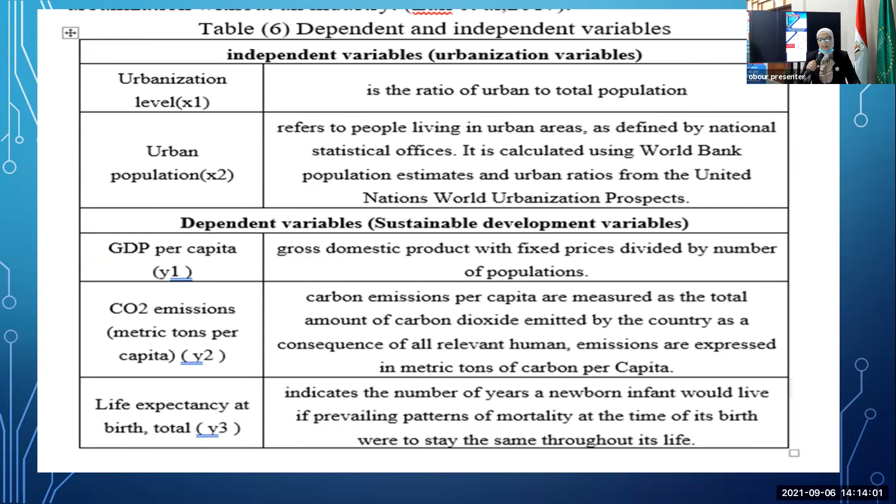Results: in the short run and in the long run, there is a significant relationship between GDP per capita and life expectancy, and CO2 emissions and urbanization indicators, where the value of R square reached about 90%, 90%, and 63% in order.

In South Africa, in the short run, there is a significant relationship between GDP per capita and life expectancy, and CO2 emission and urbanization indicator, where the value of R square reached 96%, 99%, and 31% in order.

But in the long run, there is no significant relationship between GDP per capita and urbanization indicators. That means no cointegration relationship.

Recommendations of this study: the necessity of relying on less air-polluting means of transportation in Egypt and South Africa; increasing the interest of South Africa in industrialization, innovation, and smart cities in order to achieve urbanization; and when going to urbanization, it should rely on clear and planned strategies in order to benefit from urbanization advantages and not rely on random plans.

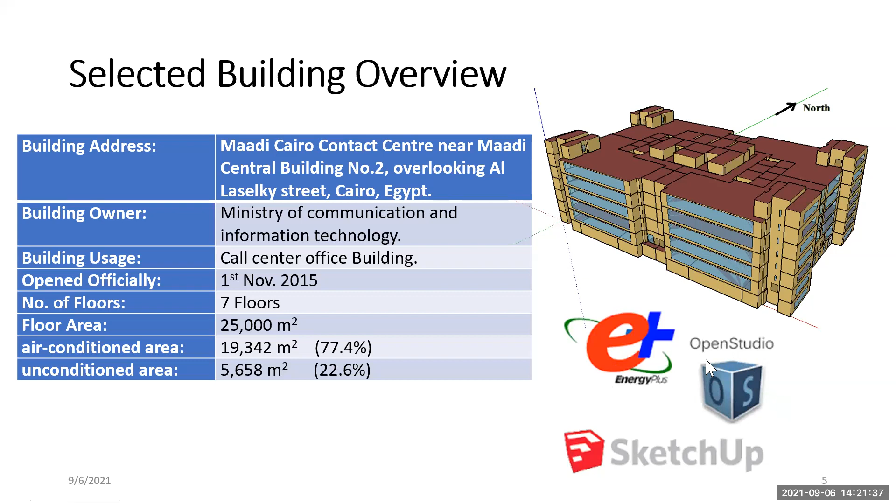So here we can see the construction of the building, and the existing building envelope thermal characteristics were obtained from the design package.

The construction of the external wall consists of sandstone and air gap insulation board and so on, with the corresponding U value around 0.28 watts per meter square Kelvin.

The glazing has a solar heat gain coefficient of 0.3, and the overall U value around 1.44 watt per meter square Kelvin. The glazing has a window-to-wall ratio of 25%.

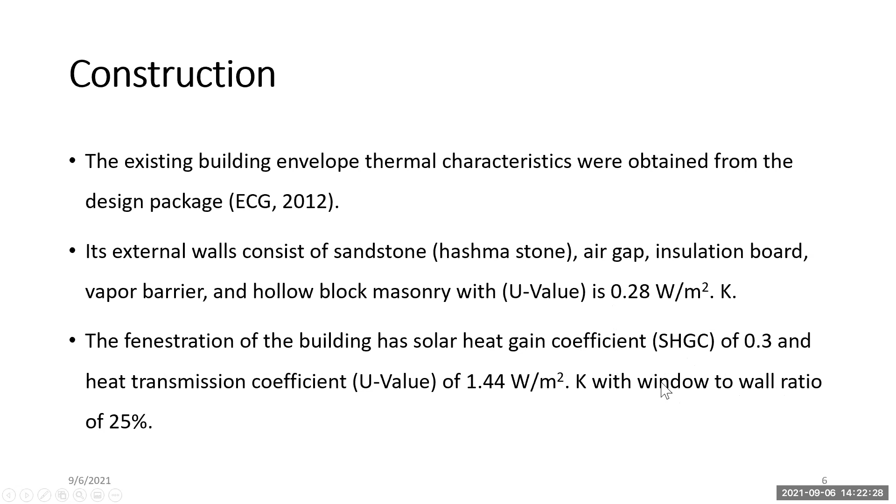Here is some information about the spaces and gains in the building. We have 251 spaces. The total occupancy per shift is around 3,100 persons. We have 3 shifts, so the building is always occupied 24 hours per day, 7 days per week. The people density is around 8 meters square per person.

Lighting schedule and values are shown here in the table. Also, we take into consideration all heat gain from the electrical equipment and the ventilation, and the schedule for each activity and each gain, like lighting, ventilation, and so on.

Here we also show some schedules for the call center area, the occupancy schedule along the day, and also the training room occupancy schedule along the day. These values change from work day to weekend or vacation day.

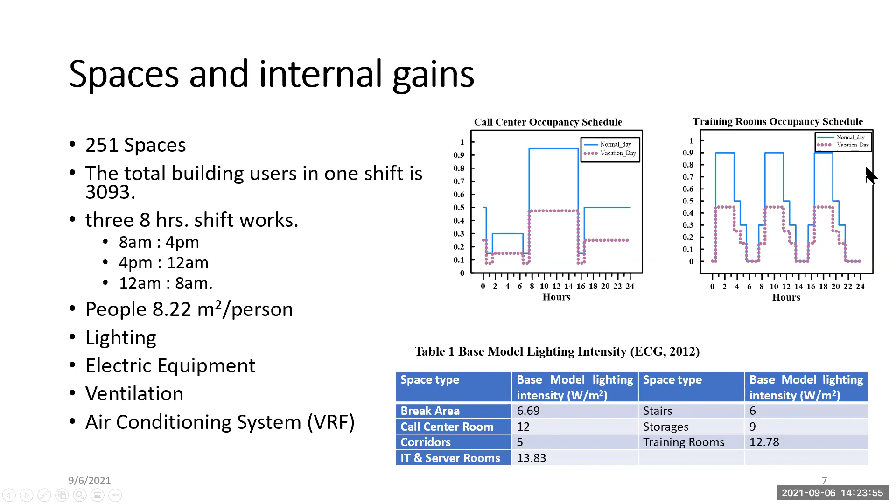So let's go to the results. Here's the annual result for the space cooling on the left and the space heating on the right.

We can now see the space cooling demand reaches around 50 watt per meter square in the summer, and the heating demand is quite small, only 1.2 watt per meter square.

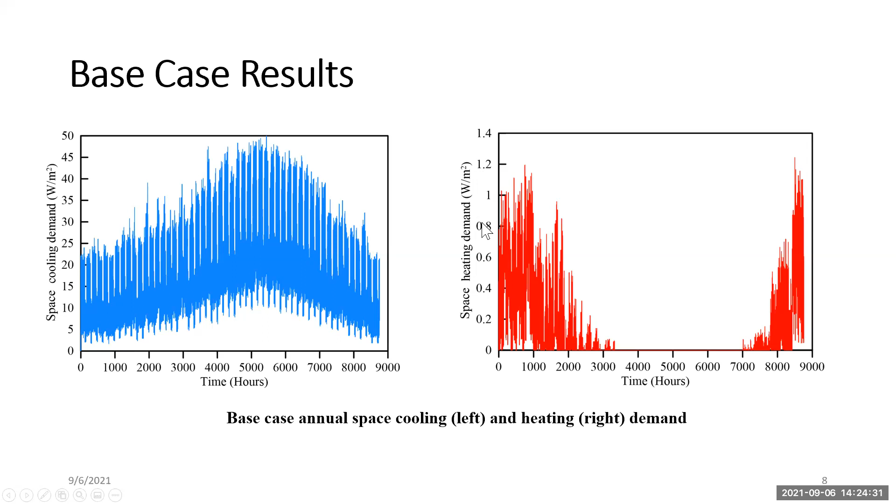In the winter, if we look into the monthly and annual demands, we can see the breakdown for the equipment demand, lighting, electrical demand, heating and cooling, and the summation of all in the black points.

This result is compared with the actual consumption obtained from the electrical meters feeding the building, and there is a good agreement, with the average error around 2% and maximum error around 8%.

If we look at the annual amount of the demands, the cooling demand has the largest portion, followed by equipment and lighting, and a very small amount of heating load. So after the validation...

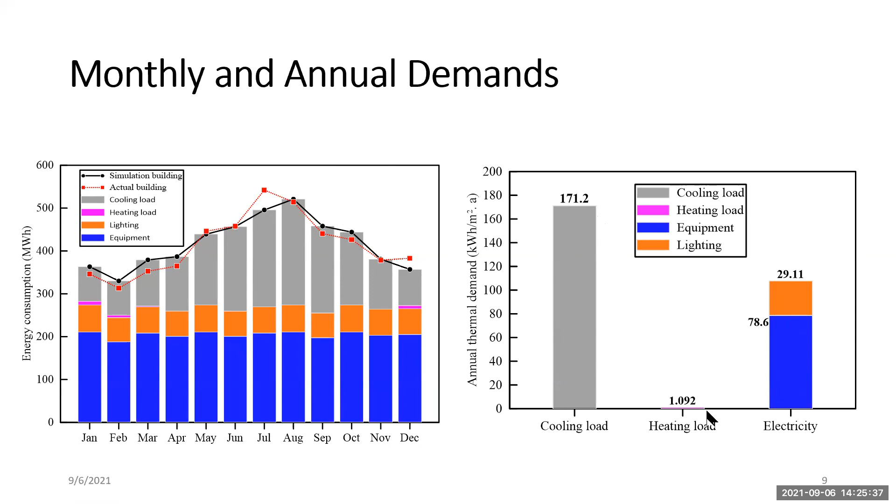We went to how to develop or reduce this energy demand. So here we suggested 7 alternative glazing types rather than the base model, and simulated these to see how much reduction we could achieve.

Here's the characteristic of the 7 types, with the first being the base model data. Here's the amount of cooling demand in kilowatt hour per meter square annually for each type. Of course, we can see type 7 has the largest energy saving regarding cooling.

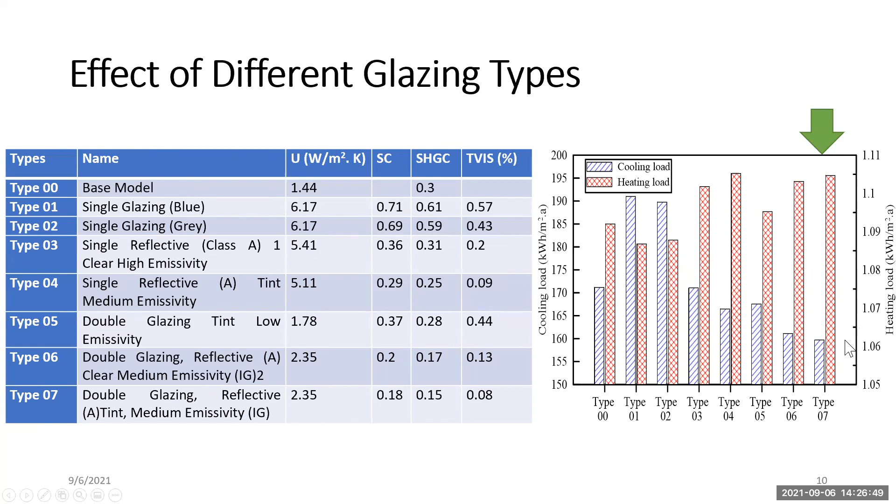However, it increases the heating demand, but the heating demand is already a very small amount. So changing the glazing in the base model to type 7 with these characteristics will reduce the overall demand of the building by around 11%.

Also, when we change or focus on the lighting fixtures and use LED light compared with other types in the market, we found that LED light with high efficacy lighting will achieve the minimum energy demand.

This reduces the cooling demand by around 8%. However, it also increases the heating demand by 5%, but this amount is very, very small, and it reduces the electrical lighting demand by around 45%.

In MANET, each node is responsible for routing its data according to a specific routing protocol. We can classify the routing protocols in MANET into three categories: the first, proactive; the second, reactive routing protocols; and the third, hybrid routing protocols.

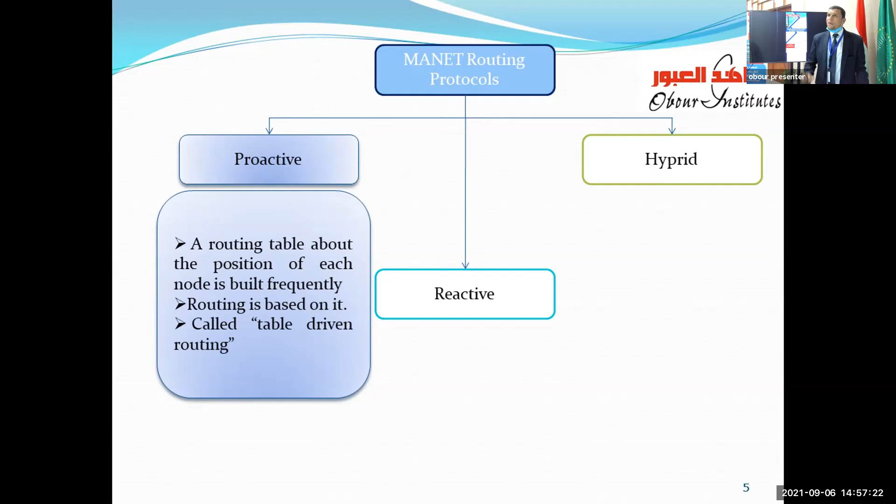The first one is built frequently by a routing table, so it's also called table-driven routing. The second, reactive routing protocol, has no predefined routing table. The routing is established on demand dynamically with the request packets. Based on the response, the next node is identified. This process continues until a fixed path is established.

This category is also called on-demand routing protocol. The third is hybrid, a mix of both proactive and reactive routing protocols.

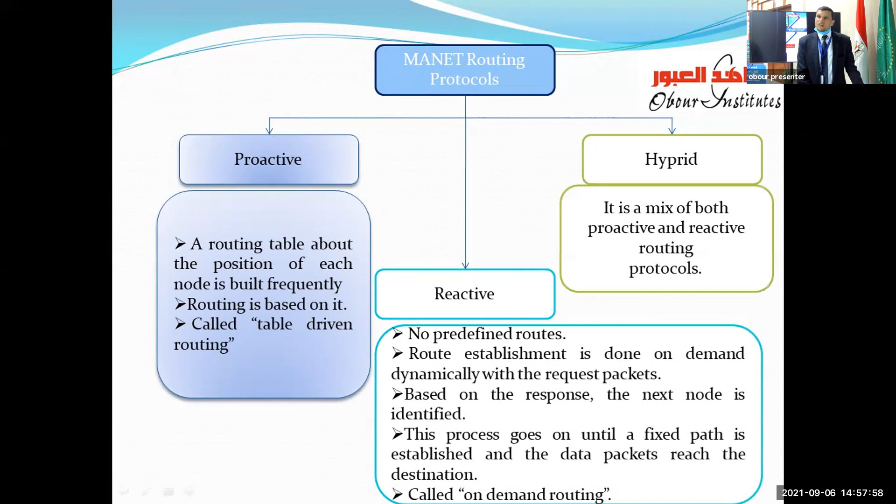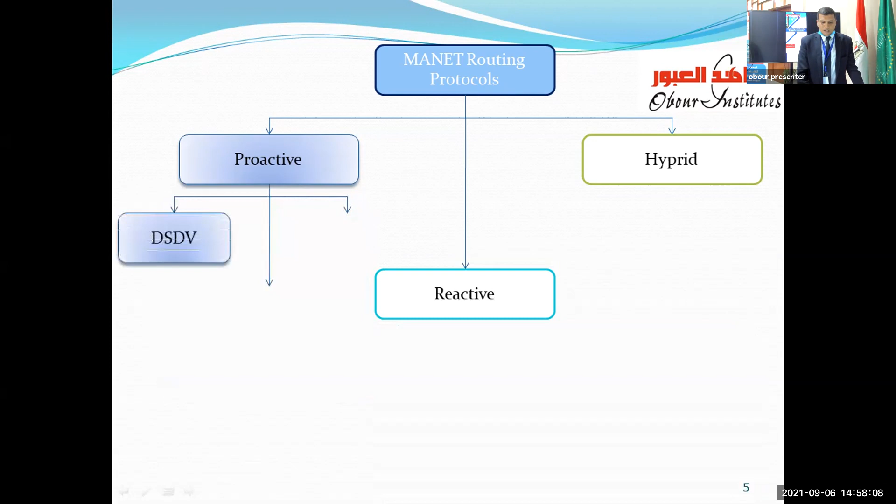Some examples of proactive routing protocols: DSDV, destination-sequenced distance vector; GSR, global state routing; OLSR, optimized link state routing.

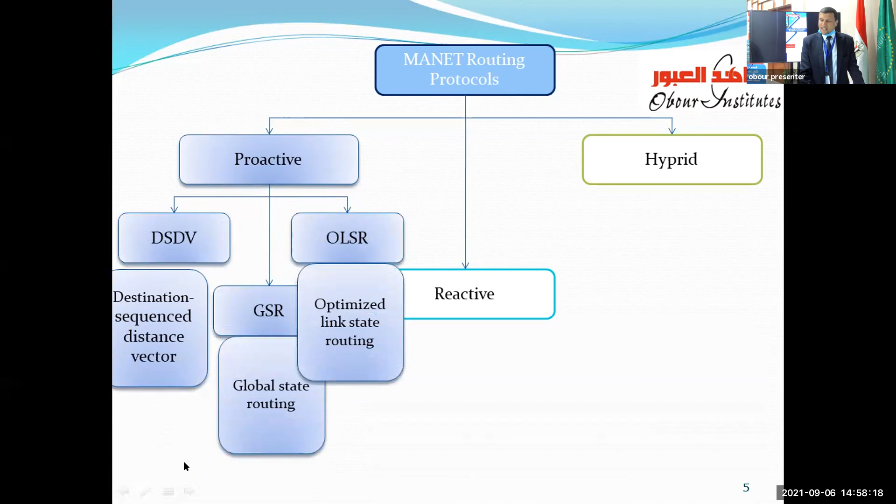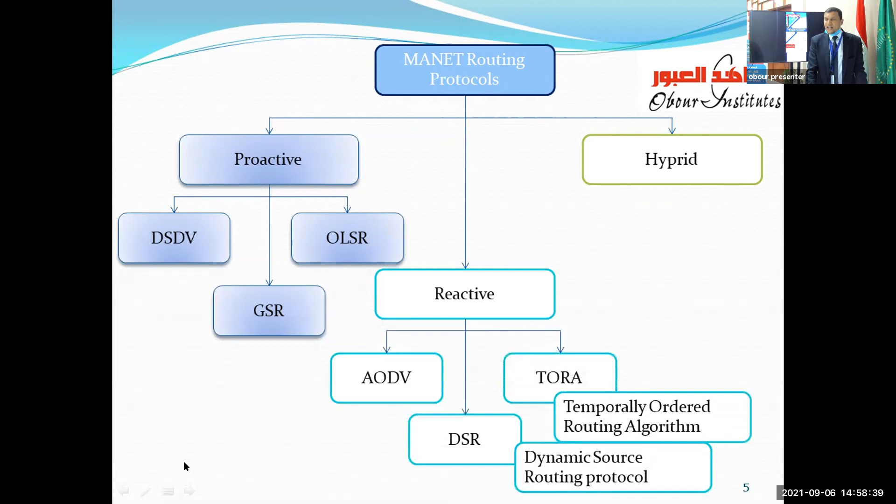Some examples of reactive routing protocols: AODV, ad hoc on demand distance vector - this is the selected routing protocol in our work. The second, DSR, dynamic source routing protocol. The third, TORA, temporally ordered routing algorithm. Some examples of hybrid: DDR, DST, ZRP, zone routing protocols.

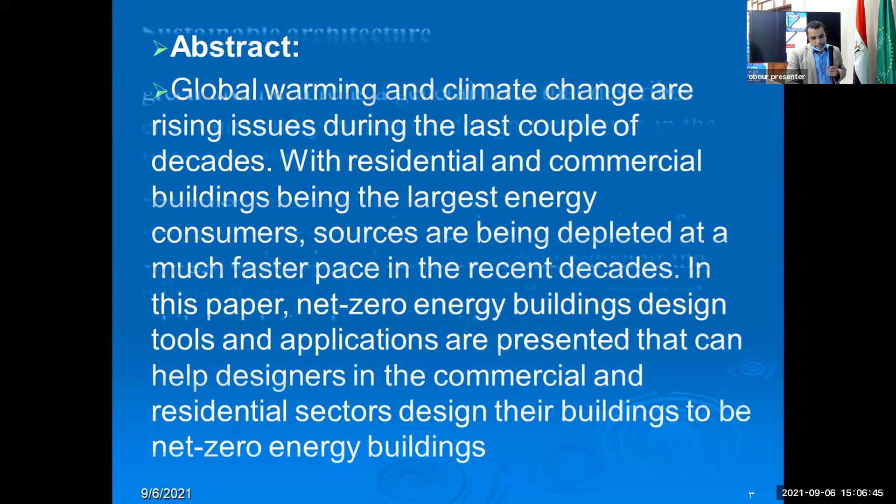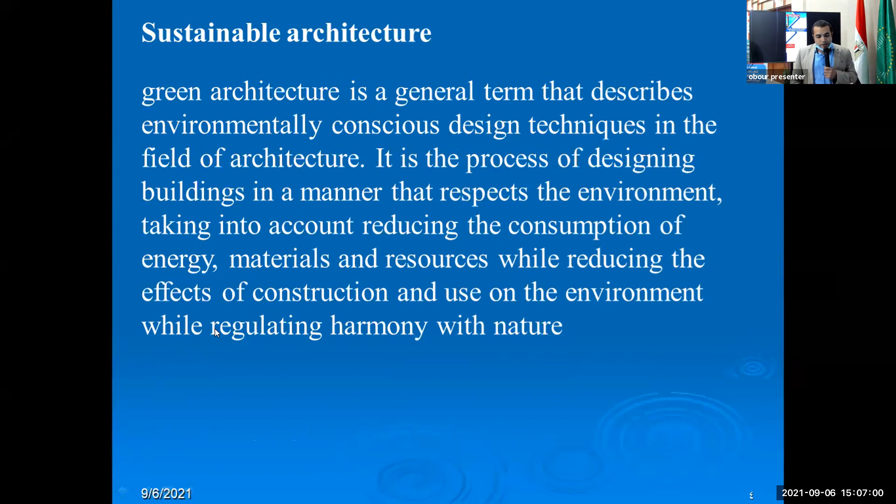Green architecture is a general term that describes environmentally conscious design techniques in the field of architecture. It is the process of designing a building in a manner that respects the environment, taking it into account, and the main goal of using this technique is to decrease the energy consumption.

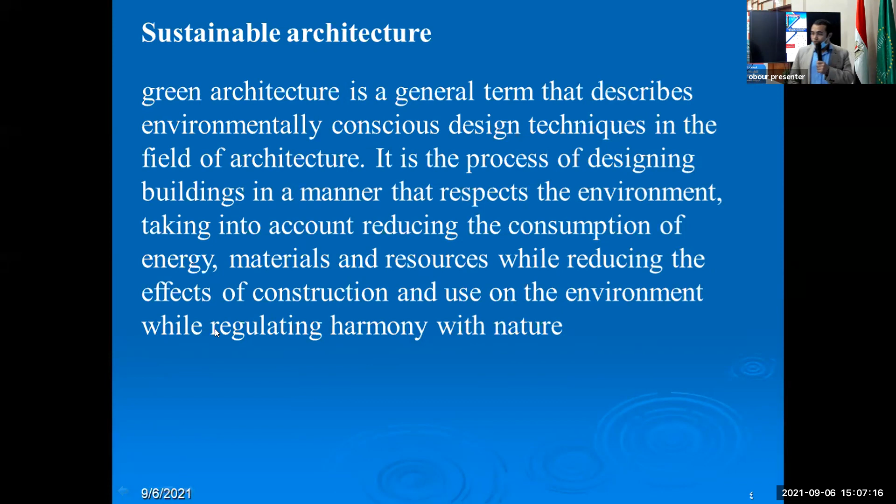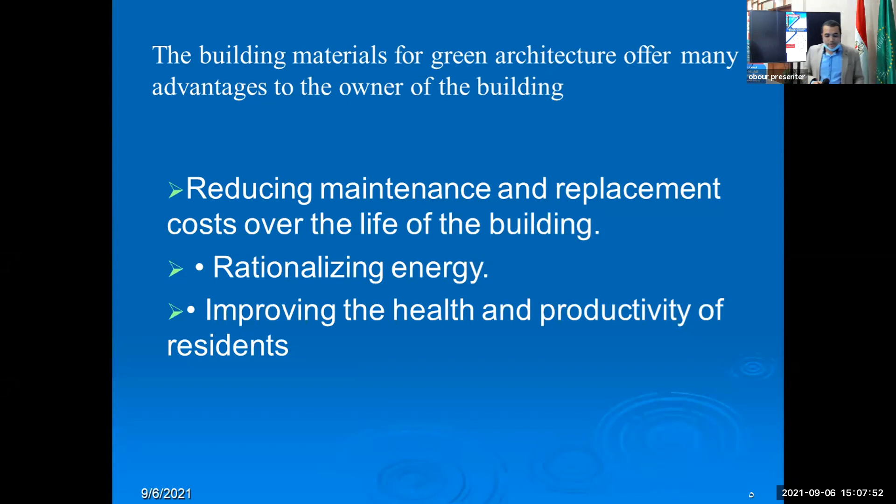The building materials for green architecture offer many advantages to the owner of the building. The first advantage is reducing maintenance and replacement cost over the life of the building, rationalizing energy savings and improving the earth, and improving the health and productivity of the residents.

Criteria of selection for green architecture materials or products: source efficiency, indoor air quality, energy efficiency, and availability.

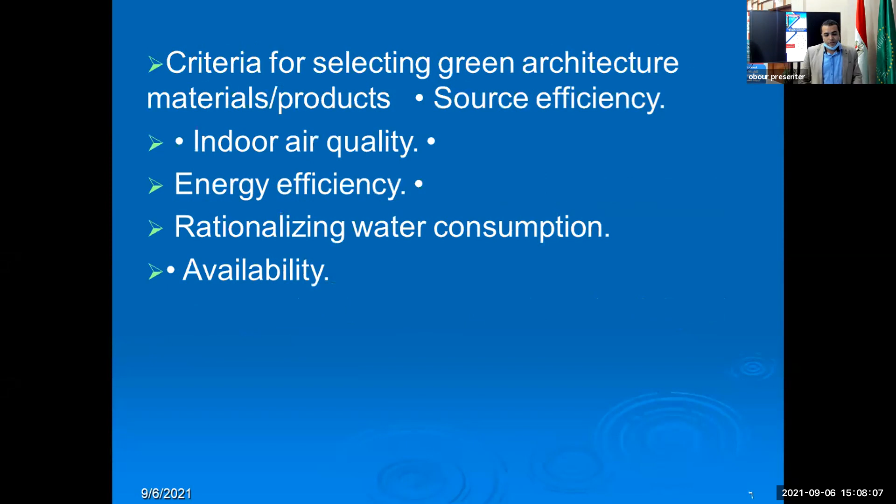Definition of zero energy: this technique has many shortcuts like ZEB, Z, NZE, or ZNE. It means the building's energy consumption, meaning the total amount of energy used by the building on an annual basis, is equal to the amount of renewable energy created on site, or in another definition, from renewable energy sources outside.

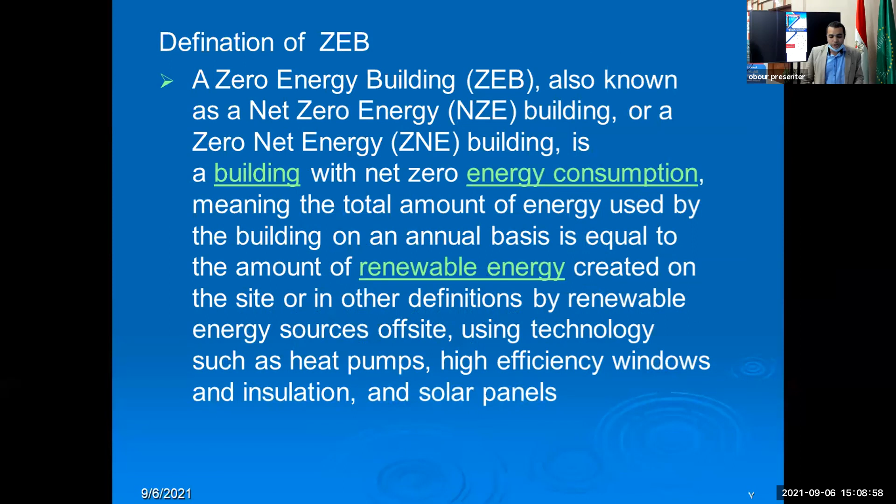Using technology such as heat pumps, high efficiency windows, good insulation, and solar panels as an example of this technique, to provide energy for the building and to be economical in energy use.

Stevens Library at the Sacred Heart Schools is located in California, USA. It is an elementary and high school, and this type of project is a very good candidate for achieving the goal of zero net energy or zero energy through design and performance, because they are generally one or two stories in height, with good opportunities for daylighting and sufficient roof area for the right-sized solar photovoltaic system.

This building is seeking to have qualification or certification as a net zero energy building under the Living Building Challenge. It is also being monitored by a third-party measurement and verification team under the Zero Net Energy Program.

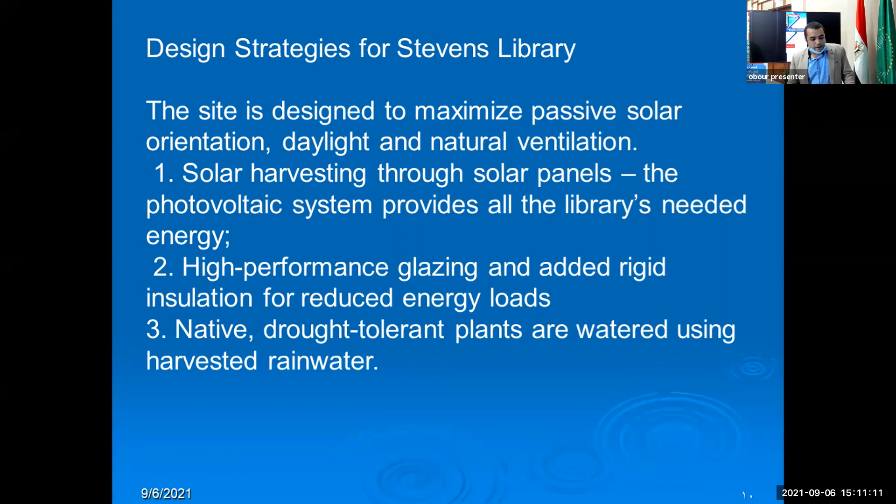In conclusion, green building aims to maintain a balance between the building and the surrounding environment, as the building protects human beings from climate conditions or changes that may occur, while not harming the environment or consuming its resources in a way that doesn't guarantee the right of future generations to obtain their fair share of the resources.